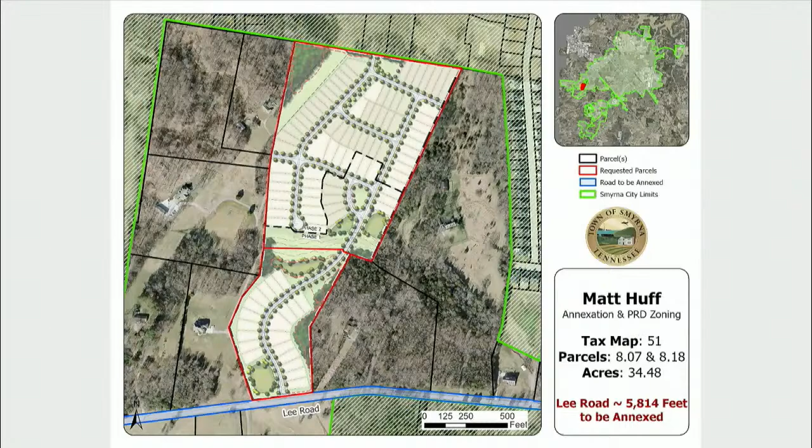Okay, so if it's annexed in, from where this development is to the next development to the east, do we have a county spot there? Would it all be from that development out? It would be all county, all the way. It's already been annexed from Montgomery Way east, not all the way to Rocky Fork, but everything that's been annexed into the town as far as the property north or south.

Where the sewer went through? Right. And on the west side, this would get everything that's west, kind of from Montgomery Way west, that has been annexed into the town. Basically, it's to the west end of Gwynn Farms.

So it annexed the road all the way up to this development? Yeah. And then it's not far from there back to Cook's Lane, is it? Yeah, because it would go, like I said, if it doesn't show up on this map, it maybe shows up. You have the parcels kind of to the west there. That's Gwynn Farms. It would go all the way to that west end, the western edge of Gwynn Farms, all the way back to Montgomery Way.

As what staff has recommended. Okay. Anything else?

I will entertain a motion. Move to approve with staff comments. I have a motion to approve with staff comments. Do I have a second? Second. Motion and a second to approve with staff comments. Further discussion? All those in favor signify by saying aye. Aye. Opposed? This motion is approved.

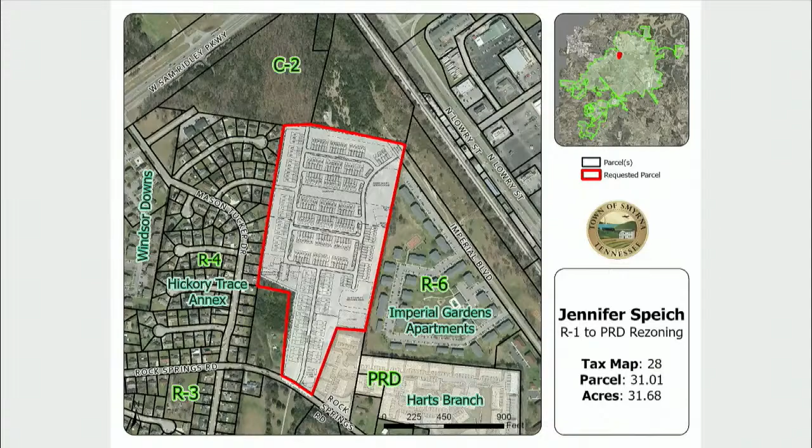But if we did not have Leadberry, if it was gated or not connected, and this passes, even if you had two streets down to Rock Springs, still people going to Sam Ridley, where would they go? They'd go down and over to Mason Tucker and still right back up the way, right? I think of traffic a lot like water. It's gonna find the easiest way to go, and I say that as someone who doesn't get on big roads as much as I can avoid them.

So I guess my point with that is, traffic is kind of a learned thing. It's still gonna be on Mason Tucker, and it's actually gonna then impact even more homeowners than the Leadberry. Nothing personal against them.

My personal opinion is connecting roads, the more you connect, the better traffic gets. That's my personal opinion and my personal experience. But at the same time, you serve a community and you have to take more concerns into account than I do. So, like I said, I can't make that decision, but I thought I would offer it up and talk to the traffic engineer. He may say that's not what we want to do, and we'll come here and say that wasn't what the city requested. But I think it's a fair question to ask.

And for my two cents worth, I was glad to see it going up Leadberry, because it's always been stubbed to do that for future use. And I understand, and we all ask for connectivity for a reason. It's fearful. If you live next to something that's not extended, it's fearful, and that's natural for us all to experience.

So I want to be compassionate but ask the questions. And so I think I'd like to request this to be deferred 30 days, just so I can answer the landscape questions a little bit more in detail, the traffic questions a little bit more in detail, then come back to you in 30 days and ask you to approve it.

If I may, I'd like to, and I may be out of where I should be right here, but I was about to make this comment anyway. This is a rezoning request, right, from R1 to PRD. And so we've got the option to not grant the request, right? So I want to make sure that that's still clear, because all we've talked about is the positive side of the request, and it's not a bad thing necessarily, but I think we all need to pay attention to the fact that that's a lot of density there.

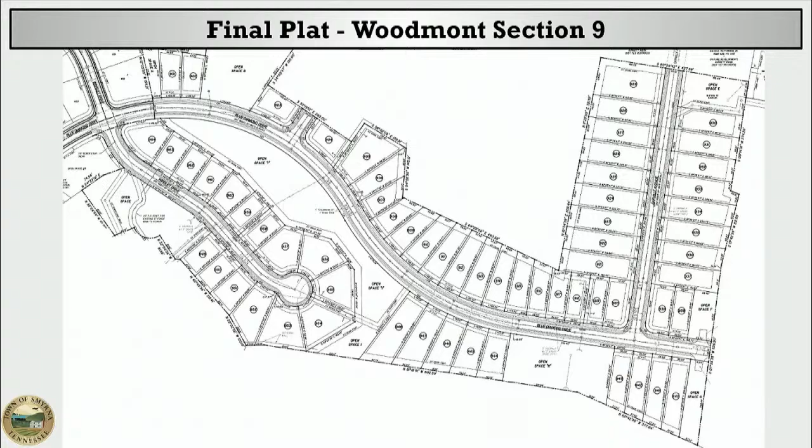It's 64 lots, 27.22 acres. It's in the Woodmont PRD. We had just a couple of really informational comments regarding Blue Diamond Drive as a collector, and they are showing the adequate right-of-way there, and minimum fire flow requirement, the standard single-family residential requirements. So they are meeting all the requirements of the PRD as well as the preliminary plat, and we would recommend this to you. Questions for Kevin on this one?

Hearing none, I'll entertain a motion. Move to approve with staff comments. I have a motion to approve with staff comments. Do I have a second? Second. I have a motion and a second to approve with staff comments. Further discussion. All those in favor of approving this final plat signify by saying aye. Aye. Opposed? This motion's approved.

We're now on to new business. Our first agenda item is annexation, zoning, and plan of service request. Jennifer Speich: 8613 and 8675 Rocky Fork Almaville Road, annexation and PRD zoning.

This is a request for annexation of about 5 tracts of land totaling about 39.65 acres along Rocky Fork Almaville Road, currently zoned RM in Rutherford County. Along with the annexation request is a request for PRD zoning. Surrounding zoning in town is a mix of a couple different PRDs, Blakeney PRD and the Courtyard at Stewart Creek, and then RM in Rutherford County.

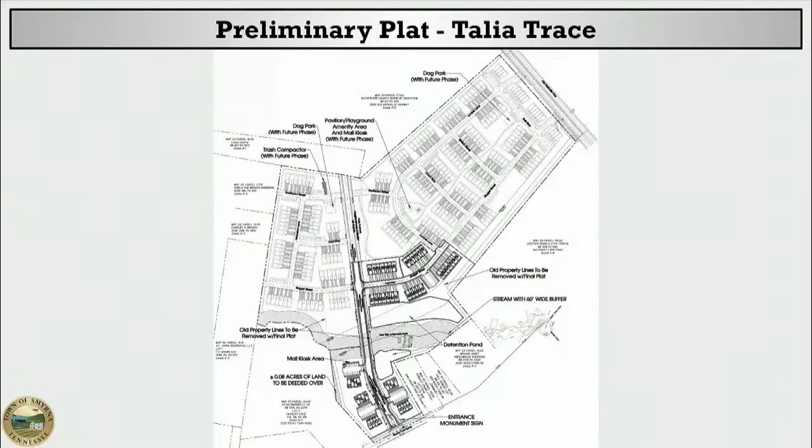We had a few comments, these are all relatively standard. I do want to point out they are dedicating the right-of-way for Rocky Fork Road there, and that we did make a recommendation regarding the final plat having to be recorded before issuance of permits, and that the water and sewer main and construction plans are still under review, so we want to keep all 8 of those comments, but they're all relatively informational and standard type comments. So with those comments, staff would recommend approval. Okay, questions for Kevin?

There were no changes from what was previously approved. No changes from what's previously approved. Move to approve with staff comments. I have a motion to approve with staff comments from Amy. Do I have a second? Second. Motion and a second to approve with staff comments. Any further discussion? All those in favor signify by saying aye. Aye. Opposed? This plat is approved.

We're now on to final plats. The first one is Rooker's Bend, Section 1, Phase 2, Florence Road and Rooker Road, owner developer M&T Development Partners, LLC. This is the final plat for Rooker's Bend, Section 1, Phase 2. It's 50 lots, 16 acres in the R3 zone. It's on Florence Road and Rooker Road.

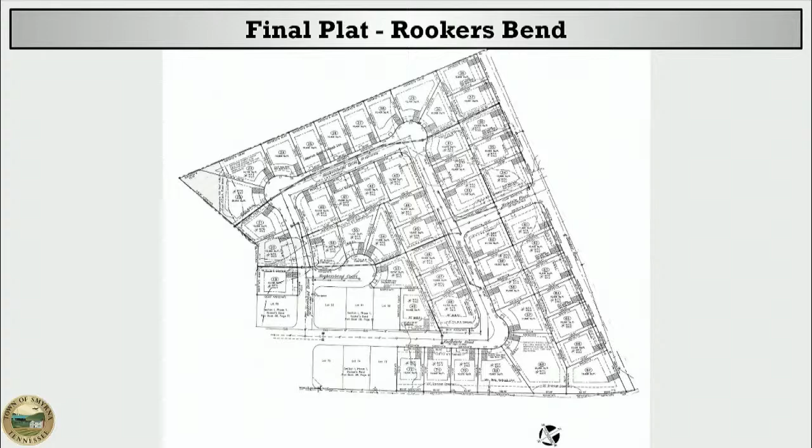We had a few comments. The major thoroughfare plan does designate Florence Road as a minor arterial, and adequate right-of-way does exist to meet the requirements of 40 feet from the center line there. And the major thoroughfare plan also designated Rooker Road as a minor street, and 25-foot right-of-way will be dedicated as a part of this plat as well. Comments 2 and 3 are just standard comments regarding signatures and fire flow.

There is a small area of core property that a stormwater pipe does cross, and we just asked them to provide that easement, so that would need to remain. Comment number 5 regarding the driveway culverts along those 3 lots has been addressed and can be removed. Comments 6 and 7 came from CUD, so we'd keep those. So basically of the 7 comments, we can remove comment 5, and with the remaining comments, staff would recommend approval. Okay, questions for Kevin?

I will entertain a motion then, or do you have a question? All right, well, I move to approve. Thank you, I have a motion to approve from Randy. Do I have a second?

Motion and a second. Further discussion. All those in favor of approving this signify by saying aye. Aye. Opposed? This final plat is approved.

We're now on to agenda item E, a concept plan. This is from Empower Academy, owner, developer, located on Enon Springs Road West, owner, developer, Springs Public Schools.

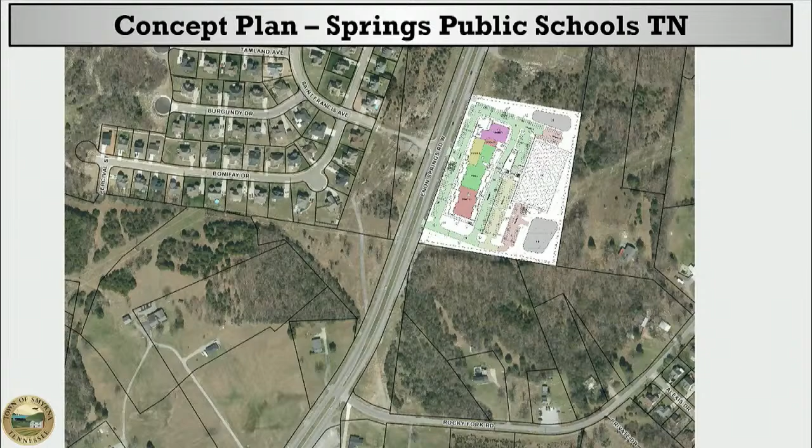I'm wondering if moving the setback back might achieve a couple of objectives—one, the security concerns, but second, could it also facilitate the queuing within the school? I'm thinking out loud now. I think queuing's gonna be one of the major issues. I think they've got enough area there that they could probably meet—we have not seen that study yet, but I think they could probably accommodate the queuing in either scenario.

The overlay, we're hopeful to see the highest level of development in Smyrna with the intent of the overlay. This would be a kind of gateway, anticipating that at some point we hope to get that interchange at Rocky Fork and I-24. We modeled it after what Murfreesboro did on Medical Center Parkway, that's what we're shooting for. That's why we wanted to bring the buildings closer to the road if possible, and those kinds of things.

From my perspective, having been part of the overlay as far as setbacks are concerned, I don't want to start seeing deviations from that, because we did that for a reason. As well as the reason for what we were looking for regarding elevations and materials that would be allowed, not allowed, or allowed at a smaller percentage. I don't want to deviate from what we're trying to achieve from a setback perspective at all. And I am concerned about safety as well.

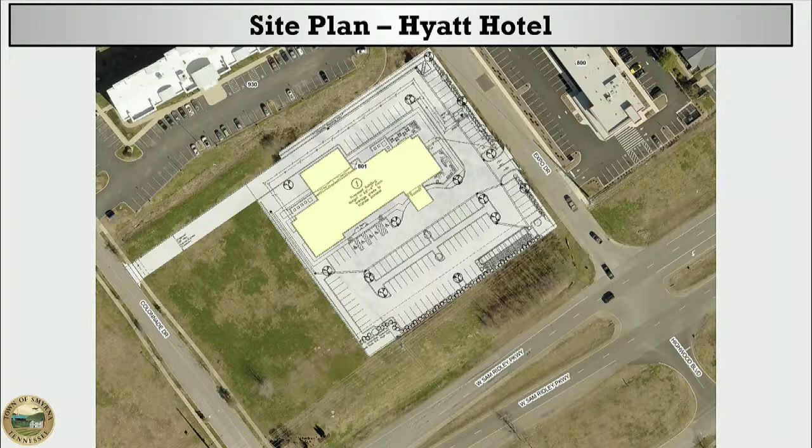It is a 118,250 square foot, 5-story hotel located at Expo Drive and Sam Ridley Parkway. The surrounding sites have hotels, so very similar use in the area. The tract over to the west is vacant still at this time, and they would have 2 access points, one off of Expo Drive, and then an access easement cutting through the western tract off onto Colonnade. Square footage of vehicular use area for the site is 51,033 square feet.

That requires 5,103 square feet of landscaping. They're showing 6,308 square feet. Total parking required is 112 spaces, and they're showing 112.

Handicap parking is 5 spaces required, and they're showing for 5. The landscape plan shows a mixture of street trees and shrubs planted along Expo Drive and Sam Ridley Parkway. Additional trees are proposed to be planted within landscape islands throughout the site.

Architectural elevations submitted show a mixture of stone, EIFS, and metal accents. The primary materials shown—glass, glazing, and stone—account for about 85% of the entire building facade. EIFS, considered a secondary material per design review, covers 5% of the building. Metal will be used only as an accent and cover no more than 10% of the building, and the current plan shows for 10%. So for all intents and purposes, the building does meet design review requirements.

Standard comments 1 through 5 all to remain. We had a couple staff comments. One staff comment was to submit construction plans for our utility department and our public works department. Comment 2 is a standard comment—the required fire flow is 1,750 gallons per minute at 20 psi, and the site can meet that requirement.

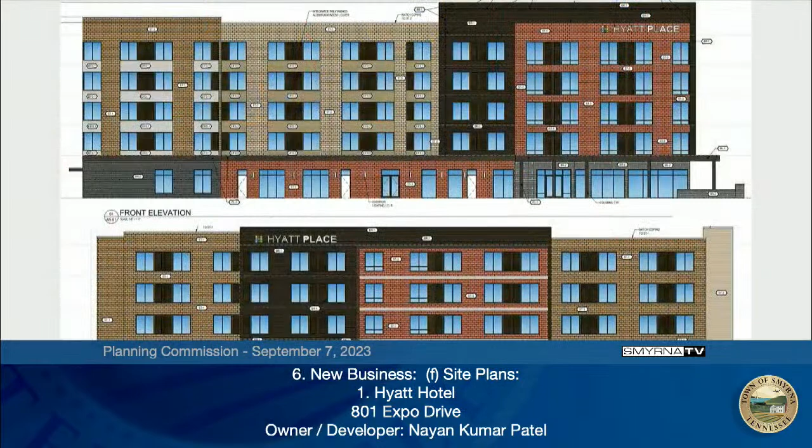Very good. All those in favor signify by saying aye. Aye. Opposed? This site plan is approved.

Next, we're on to Talia Trace, Section 1, 12495 Old Nashville Highway, owner/developer Old South Properties. As Kevin mentioned earlier tonight on that preliminary plat, the site plan is on the same boat.

It's expired, so they are seeking reapproval for it. This was previously approved back in July last year. This first phase, which they are seeking, is 52 units, which would consist of the total 271 for the entire development. There's a single access proposed onto Rocky Fork Almaville.

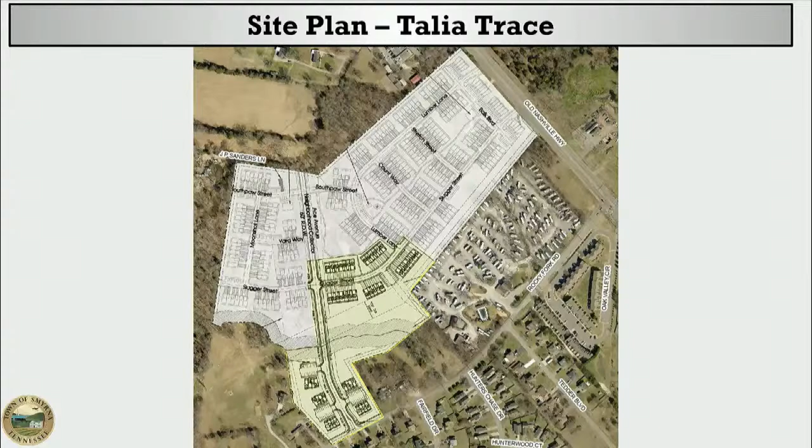The square footage of vehicular use area for the site is 22,062 square feet, and that does require 2,206 square feet of landscaping. They are showing for 3,425 square feet. Parking required is 104 spaces; they have a total of 178, which is a mixture of surface, garage, and driveway.

Handicap spaces aren't required, being this is a townhome development, but they are showing for 1 at one of the common areas. The landscape plan shows a type C landscape buffer bordering the properties to the east and west, which are zoned R1. A variety of trees and shrubs are shown lining the collector road, which is the main entrance off of Rocky Fork Almaville, and continues north through the subdivision. Additional shrubs are shown at the base of each unit.

Architectural elevations submitted show the first floor to be built with brick and the second floor to be built with a mixture of fiber cement and brick. The elevations are consistent with the approved PRD.

Standard comments 1 through 5 all to remain at this time. Staff comment 1 is regarding the utility lines, and that's going to be determined by the town developer at a later time. The mail kiosk shall be installed and operational before the COs are issued for the first building.

And since this project was last approved, the revised flood maps have been adopted, so we just want them to update the date on the plans reflecting the most recent date of those flood maps. So with that, staff would recommend approval, and this is the exact same plan that y'all approved last year and saw.

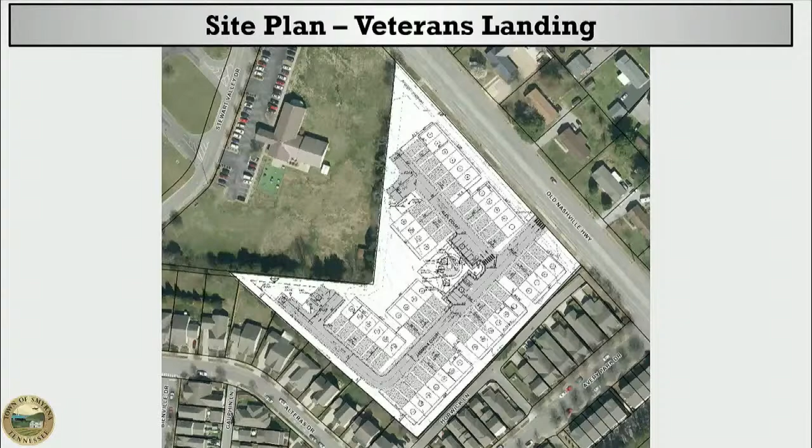So in doing so, they have achieved a 15-foot wide landscape buffer along that southwestern property line. For all intents and purposes, everything is exactly the same except for that reduction of a unit, reduction of parking space, and increasing that to a 15-foot wide landscape buffer to a type C. Everything else is the same on this.

Staff comments should all be the same on this, but standard comments 1 through 7 shall remain. Comment 1 was regarding the road name approval list, and they have provided that to us, so comment 1 can be removed. Comment 2 is a comment from our Public Works Department. It can remain; Public Works will have another chance to review that when grading permits are issued. Comments 3 and 4 are CUD comments, and those will remain at this time as well, but staff will recommend approval with those remaining comments.

So in essence, they went back and they're now meeting the design requirements we've asked for. Correct. They've worked through it, and they've found a way to shift some things around, eliminate a unit, and they've been able to achieve it. So we've got something with no deviations to what we require. Okay, awesome. And still consistent with the approved PRD. Yeah, with the prior approved PRD.

You heard from Mitchell. Any further discussion? I'll move to approve with staff comments. I have a motion to approve with staff comments. Do I have a second? Second. Motion and a second. Further discussion? All those in favor signify by saying aye. Aye. Opposed? That motion's approved.

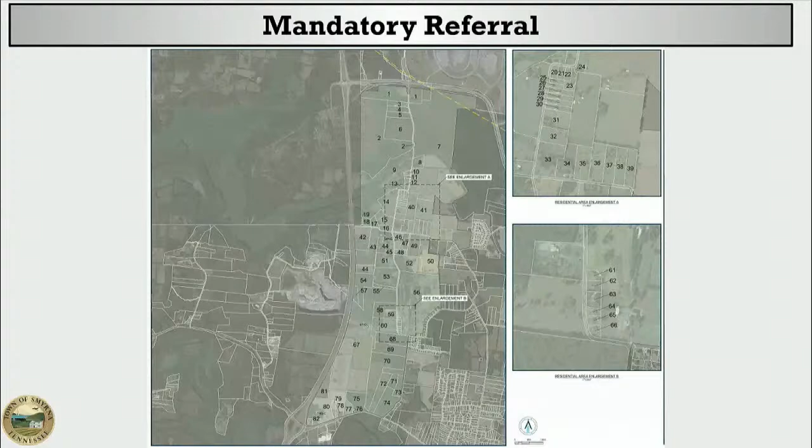Okay, you heard from Kevin on this. Any questions? I'll move to approve with staff comments. I have a motion to approve with staff comments. Do I have a second? Second. Motion and a second. Further discussion? All those in favor of this recommendation to council signify by saying aye. Aye. Opposed? This is approved.

I think we're on to the September bond review report, which is always entertaining. Kevin? Actually, we have the subregs first. Oh, I'm sorry, I'm jumping ahead. I'm just getting hungry, ready to go home. Did that earlier, so it's okay.

We did send out a draft of some revisions to the subdivision regulations. This is something we have not looked at in a comprehensive way since 2009. There are some changes in state law that we needed to adopt. We also wanted to bring about some consistency with our adopted fire code as well as the stormwater ordinance. There's a lot of pages in there, but I did provide a summary to hit the highlights of what we're talking about, so I'll go through those.

We did revise - currently everything says Director of Public Works, and we revised Director of Public Works to Town Engineer in multiple places, and in some places we did and/or there, depending on the responsibility of the individual. We also revised our section regarding vesting rights. State law has changed on that, so this would make that consistent with state law.